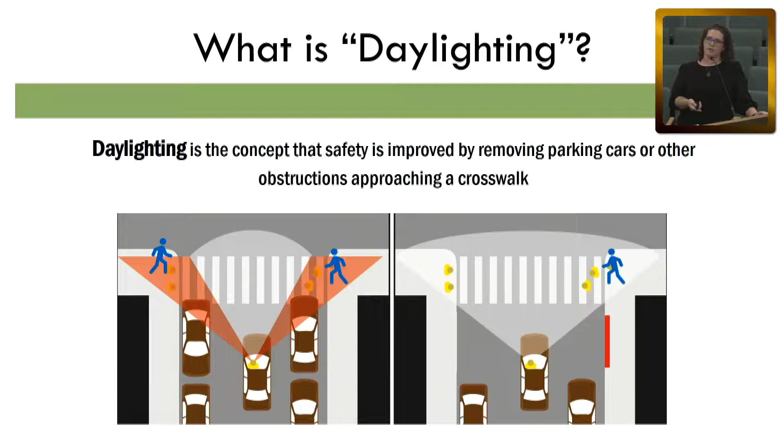So what is daylighting? It's the idea of making intersections more visible, the concept that safety is improved by removing parked cars or other obstacles approaching a crosswalk. In this graphic, on the left we have parked cars right up to a crosswalk, people crossing in both directions, and an approaching vehicle whose line of sight is obstructed between the pedestrian and the driver because of the parked vehicles. On the right side, where we have a red curb and no parked vehicles, the line of sight is open. The actual AB 413 bill text says: a person shall not

stop, park, or leave standing any vehicle, whether attended or unattended, in any of the following places: within 20 feet of the vehicle approach side of any marked or unmarked crosswalk, or within 15 feet of any crosswalk where a curb extension is present. This text amended Section 22500 of the California Vehicle Code. As you can see, this is item N. There are many other areas that are prohibited for parking; this is just an additional one.

There are a couple caveats at the bottom. Until January 1st of next year, only warnings can be issued for violations, unless the person parked where there is already a red curb or a no parking sign in place. The other caveat is that a different distance than 20 and 15 feet is allowed, but it must be justified through traffic safety engineering standards.

So breaking down the text of the bill, what is a marked crosswalk? On the left here we have a 4-leg intersection of Shadelands Drive and North Wiget Lane in the Shadelands area. It's stop controlled, with marked crosswalks, kind of what we think when we think crosswalks. On the right side we have what we'd call a T intersection, also on Wiget Lane but further south on Cedro Lane. This is a school crosswalk, so you can see we have yellow crosswalk striping and some curb extensions that were mentioned in that bill.

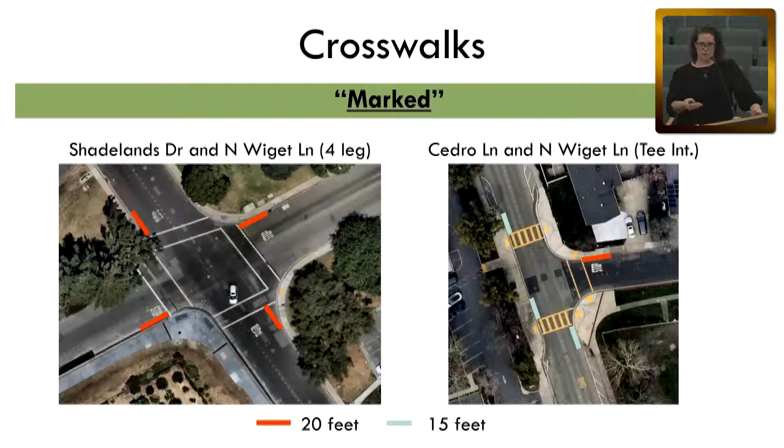On the right side, this T intersection, again approaching a crosswalk, we have curb extensions. So instead we have 15 feet. It's relatively close to the crosswalk, but coming southbound, the approach direction has 2 crosswalks, so there's 15 feet in advance of the first one and 15 feet in advance of the second. At this location, it's in an intersection, so there's no need to further restrict parking. It's a travel lane, there's no parking here anyway.

So then we get into unmarked crosswalks. Technically, whenever 2 roads intersect, there are crosswalks at that intersection, marked and unmarked. On the left-hand side is a typical residential street with unmarked crosswalks. On the right side, we imagine as if those same striped crosswalks are applied at this location, applying that same width.

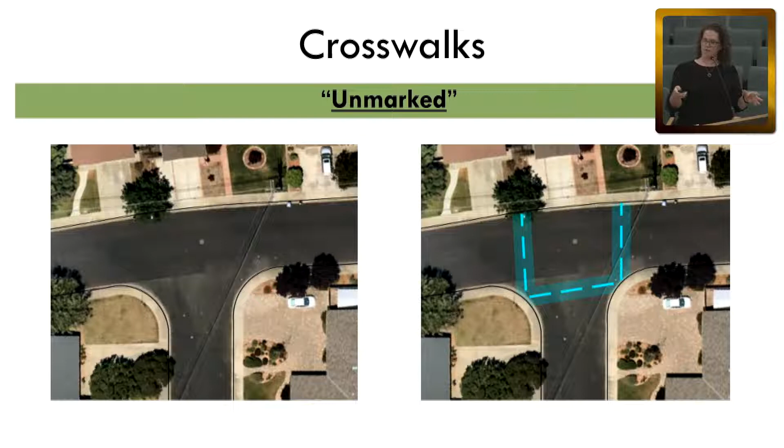We now have areas where parking is not permitted or is prohibited. So walking through this, it currently has no striping. Coming from left to right, it doesn't really make sense to park here. The curvature of that corner starts similarly coming from top to bottom, but it's that T side of the intersection where there's a lot of curb space that was previously used as parking, that under this AB 413, parking is now prohibited.

As we've been rolling this out, these are a couple of common questions we've been receiving. One: when 2 streets intersect, there's crosswalks—does this apply to courts and cul-de-sacs? Yes, they intersect, there's crosswalks.

Does this apply to an alley? Not entirely. In Walnut Creek we have commercial lane, that's really where we have an alley. It does not entirely apply to the alley, and it does not apply across the street. If you're walking across and you have to cross the alleyway, that part's a crosswalk, but not across the major component. That's because of the California Vehicle Code definition of what a crosswalk is.

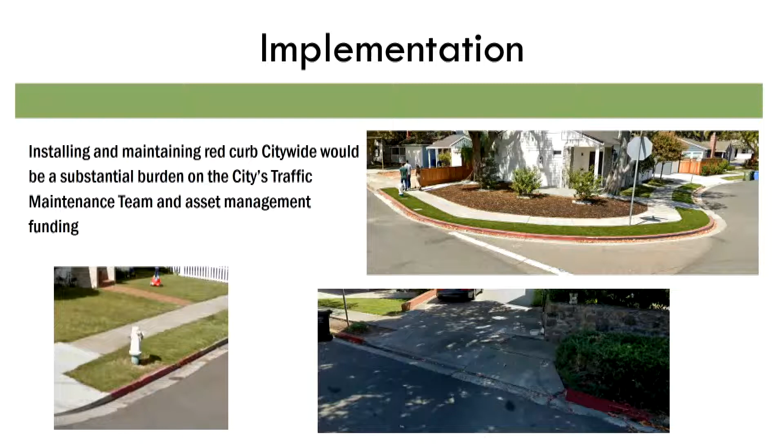As we've been rolling this out, the priority here is traffic safety. AB 413 is about traffic safety, where we're putting this red curb to make sure no one's parking here. There are areas known to have many pedestrians and bicyclists—we use the term vulnerable roadway users. These are individuals not protected by a vehicle if a collision were to happen, and they have a higher chance of injury or fatality.

The areas where we've completed our review and red curb installation include downtown Walnut Creek, and then all of our trail crossings: the Contra Costa Canal, Iron Horse, Ygnacio Canal Trail. Each one of those has that daylighting, the 20 feet clear.

The next section we're currently involved with includes all the areas around schools. What we're reviewing there, we call it the walk shed—it's the quarter-mile distance where a pedestrian would more likely be walking. If there's a known walking route a bit further outside of that, we'd look into that as well. Other prioritized locations we're looking at are community spaces, parks, pools, community centers, senior centers, libraries. It's this item where if the commission can think of other uses with walking and biking that we should thoroughly review as well.

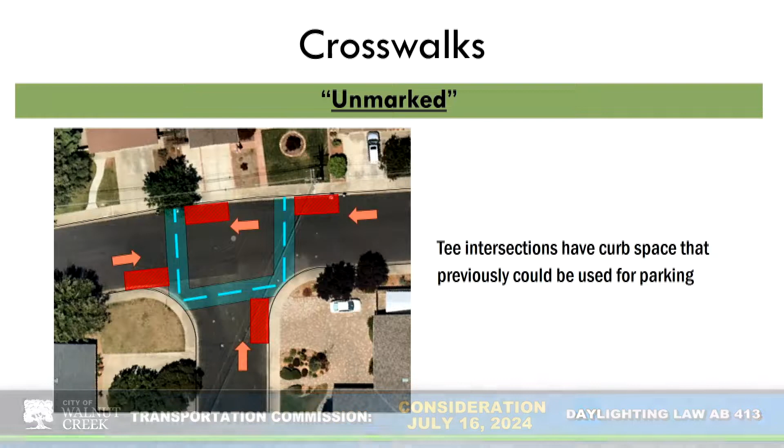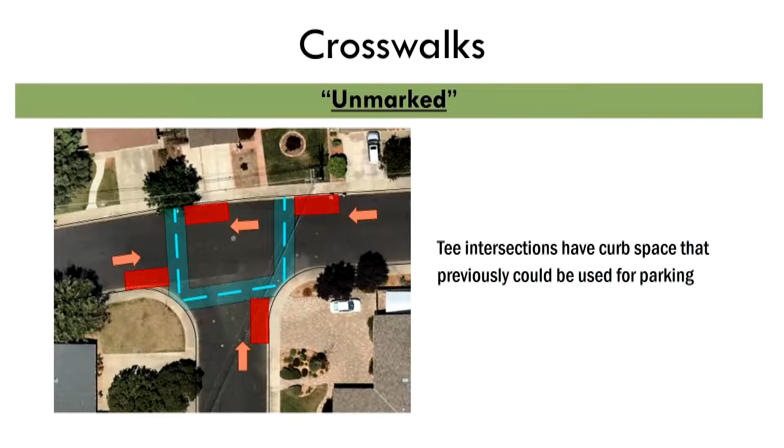So can you go to the unmarked slide? That one, yes. I just want to be clear - if it's two streets intersecting with a straightaway on one side, that still includes the lead up to that intersection? Correct, so in this case that's like the top of the T. I feel like that's going to be the most confusing one for people to understand because the crosswalks are unmarked, and it's not like people intuitively think that side of it is the intersection. So has the team thought of any way of indicating those specifically without having to do a red curb?

So that's where a lot of the education component has come in. Last week we just did a neighborhood workshop, and this was a very popular flyer that got handed out. But we're open to it - we could possibly do temporary striping, but yeah, we're really not looking to do red curb. I totally understand that, don't want to incur that cost. I was just wondering because I live in an area that's going to experience that.

For the community spaces, one suggestion I have for staff to look into is where people park for BART access that's not in the BART parking lots. There are some side streets walking distance of both Pleasant Hill and Walnut Creek BART stations that during the week will have a lot of people parked there and walking, because they'll be walking from their car to BART and back. So that might be a high traffic area staff could look into. I live equidistant between the BART stations, so I see it on a consistent basis.

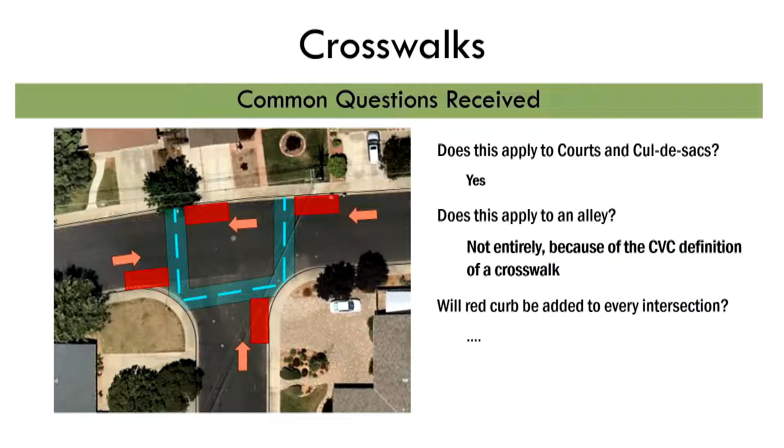On the outreach, I think repetitive social media broadcasts would be really good—Nextdoor, Facebook, Instagram, etc.—because so many people are on social media. And the other thing, which could be a mitigator to painting red in these residential situations, is I don't know if we have, or could have, temporary signs that rotate around the neighborhoods. That could work without painting permanently, kind of like those digital speed signs, but much less fancy.

I think that was it. Thank you.

I second the concerns about the T intersections, because unmarked T intersections and implied crosswalks are not things people think about, particularly on the street that's the top of the T, where people park. It's an easy place where they think they're not in the way. So I like the idea of temporary, foldable, collapsible signs there for a bit to see if that helps people stop parking there, maybe testing those out in high-trafficked or high-impact areas to teach people, since these basically eliminate two parking spots.

Also, an idea: Walnut Creek has a lot of car dealerships, and I was wondering if there's a way the city could work with the dealerships so that as people buy new cars, they get a reminder of the new parking laws, or at least post signs at the dealerships. Some sort of partnership with them would be helpful, because that's a period when people are focused on vehicle use and traffic laws. Thanks.

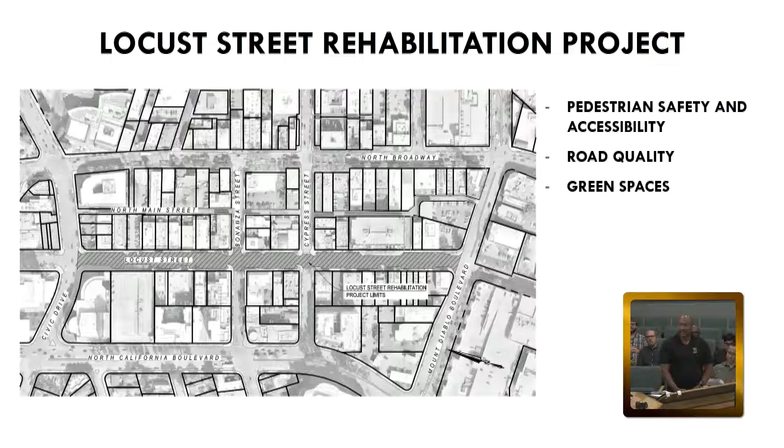This project is one of the final phases of Locust Street, as all the utilities—East Bay Mud, Central San, PG&E—have all upgraded their utilities there. Some of the areas we are looking at, not all of them, are pedestrian safety and accessibility, road quality, and green spaces.

Our contractor is currently working on Locust Street. We are currently on the southwest corner of Bonanza where they are upgrading the concrete work. We are repairing damaged sidewalk that has been damaged by trees, and we are upgrading all our curb ramps so that they are now ADA compliant.

We're increasing the width of sidewalk areas where we have existing planters, giving back additional width of the sidewalk. We're addressing the new daylighting requirements by allowing pedestrians to see drivers and vice versa more easily. We'll be repaving the roadway from Civic down to Mount Diablo, which will allow for a smoother drive and improve the quality of the road.

Finally, we will be rejuvenating and increasing planter areas. Some of these planter areas will also be stormwater treatment facilities, and we will be replacing trees that we have cut down. We hope that once we're done with this project, it will be an area that is more easily walkable for our pedestrians, and provides a nice location for our businesses and for their patrons who come down to our downtown area. Thank you.

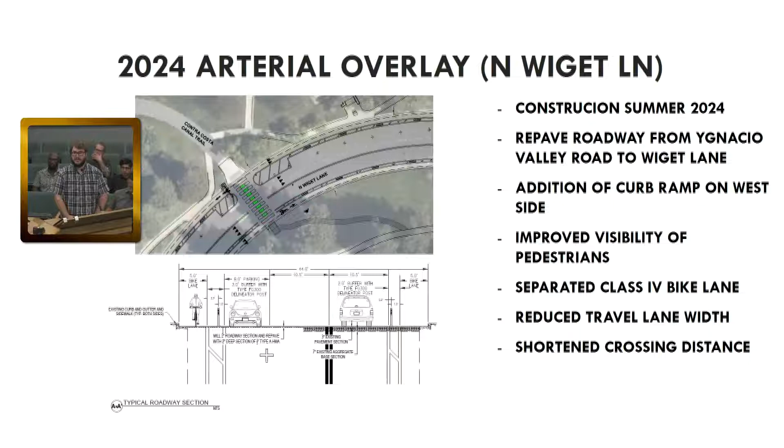In addition to that, we will be doing striped curb extensions at the intersections of Mitchell and Shadelands, just to help reduce the crossing width for pedestrians, reduce the travel lane, and get people to cross quicker. This is going to be going into construction in about a month.

The next one to talk about is the 2024 and 2025 slurry seal project. This project is part of our annual surface treatment program that we do every year, and for this year we're going to be doing two types of treatment: a slurry seal and a cape seal.

These treatments will be applied along various roads within the Livorna Estates and Castle Hill neighborhoods. Part of the two different types of treatments is that slurry seal is considered one layer, and Cape seal is considered two layers, so it's a much hardier treatment.

As part of that, it requires us to upgrade all existing curb ramps to ADA compliance, and that's what we've done. We just finished that up last week, where we constructed ADA curb ramps along Lancaster Road and Castle Hill Road in anticipation for the Cape seal that's coming in.

One thing to note about the Cape seal is that Lancaster Road was initially slated for this year's Cape seal, but due to some conflicts with utilities, that will be pushed back to next year's slurry seal project. We still did the curb ramps this year in preparation for that.

In addition to the curb ramps, we're also going to be putting in Class 3 sharrows along Castle Hill and Lancaster Road next year, as part of the grand bike plan at the city. As far as 2025, we do not have the roads picked yet, but they will be in the Larkey Park, Buena Vista, and Dorado Park neighborhoods, and we'll start getting started on selecting the roads.

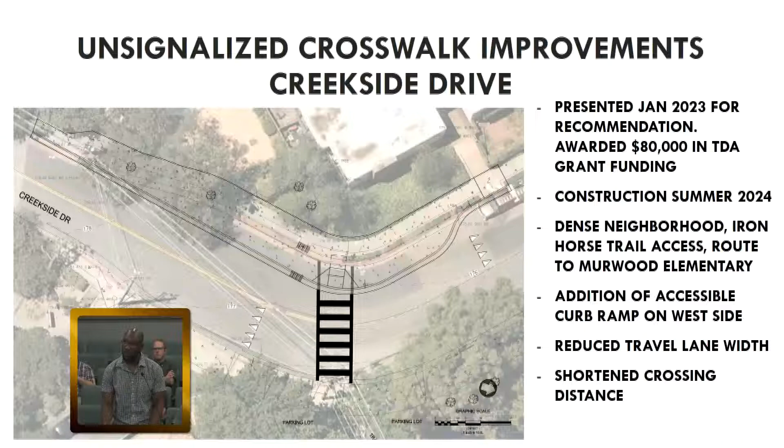The next project I'll be discussing is the Shadelands area crossing improvements, which we're bidding this summer. This project consists of the addition of rapid flashing beacons at the Viamonte Senior Housing Facility, as well as a rapid flashing beacon and striping improvements in front of the School of Performing Arts on Mitchell. These are in hopes of increasing pedestrian visibility.

This summer, we will be bringing these improvements to more locations throughout the city, as well as adding rapid flashing beacons to locations which have already received striping improvements.

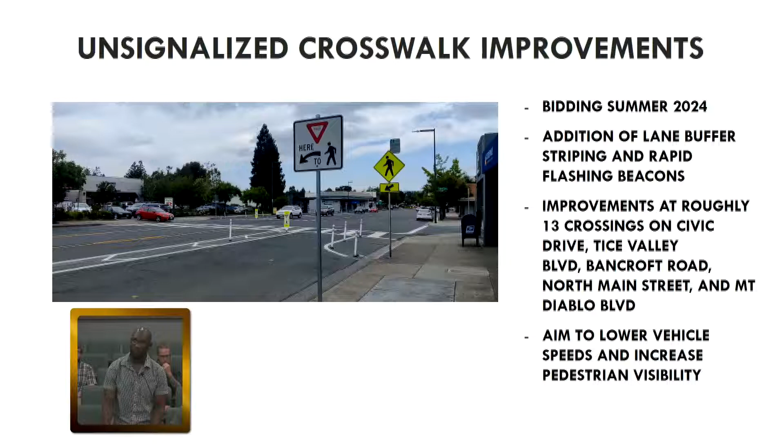Caltrans is responsible for inspecting the majority of the city's bridges. There are a few that do not meet the Caltrans criteria, so in 2022 the city hired a structural engineering firm to assess these bridges that had not been inspected by Caltrans. One of them was the Castle Hill Bridge at Tice Creek, and it was determined that it was structurally deficient, so an emergency strengthening project is going to commence this summer. That strengthening project is going to be installing steel I-beams at the existing wooden girders, and a full replacement is planned for future CIP projects.

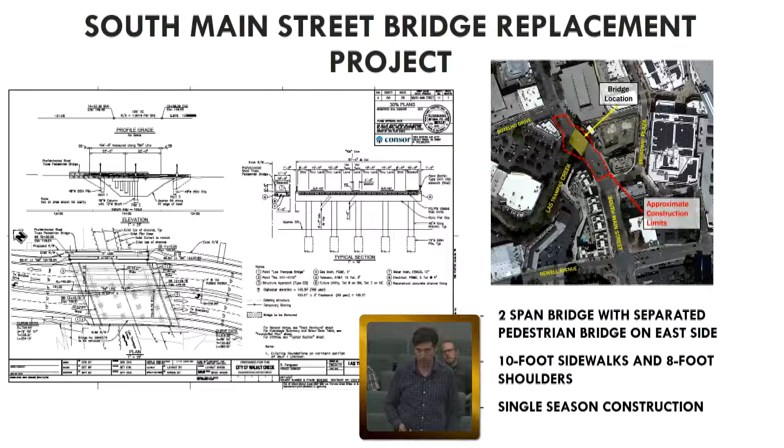The next project that I'm going to discuss is the South Main Street Bridge Replacement Project. This is one that has been discussed at the commission meetings in the past. It is going to be replaced, the existing bridge, with a 2-span bridge. One of the spans is going to be devoted to pedestrian bridge. It's going to be a 10-foot wide pedestrian bridge that will also function as a utility bridge. During construction, vehicular traffic will be diverted around South Main, detoured either through California or Broadway. This is expected to commence in the next several years. The design is still being worked on, but thank you.

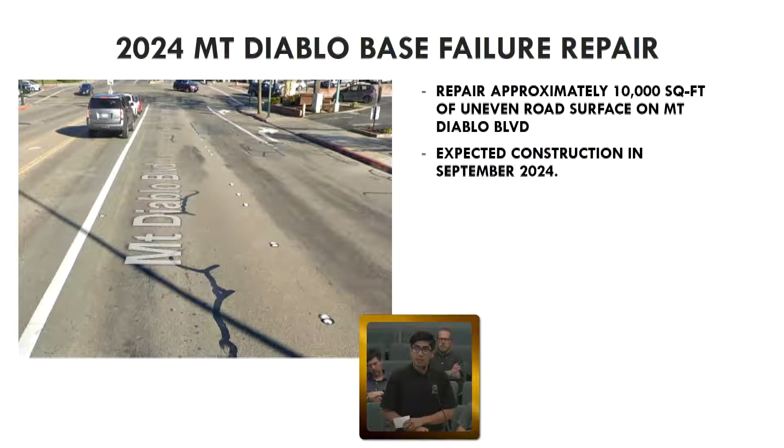The next project that I'm working on is the Mount Diablo Base Failure Repair Project. For this project, we will be repairing approximately 10,000 square feet of uneven road currently on Mount Diablo Boulevard, especially on the eastbound lanes downhill intersecting North California Boulevard. This project was recently awarded at the last council meeting, and it's expected to be in construction in September of this year.

The last project that I'm here to talk to you about is the Ygnacio Valley Road base repair and restriping. We will be performing base repairs on urgently needed locations throughout Ygnacio Valley Road from San Carlos Drive to the city limits, the side that intersects Concord.

We're scheduled to repave Ygnacio Valley Road from Oak Grove Road to the city limits at Concord in 2026.

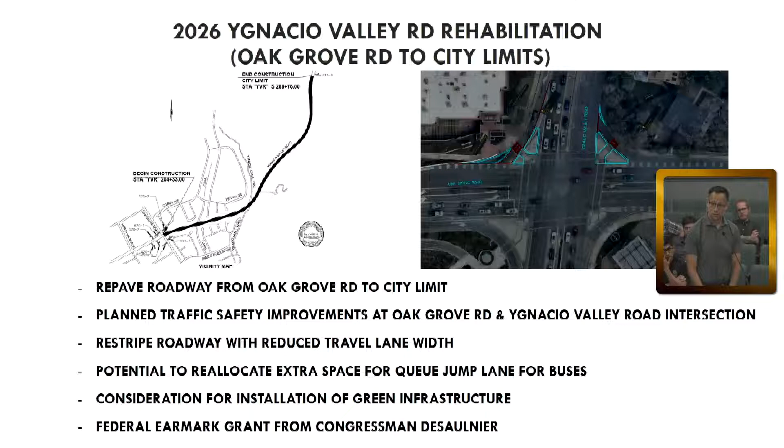Construction will be funded in part by the federal One Bay Area grant. City staff has been working with the school on the frontage improvements as the school is planning a project on the school property to improve their facilities, including traffic circulation to their pickup and drop-off areas. The school's project is scheduled for 2025 and the city's project is scheduled for 2026.

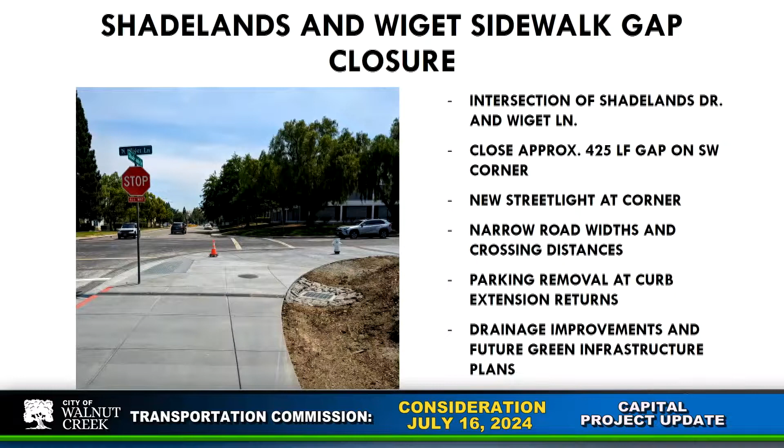Okay, so this is the one that you marked for the future to have a 5-foot sidewalk and a bike lane, yes? Yeah, that's correct. Both grade separated up on the sidewalk.

Any plans for trees? Because right now it looks very, very hot. Not that I'm aware of. That would come later down the road, but that's a good suggestion. Okay, I mean, it's fine. You can't see some of the trees. Well, it looks like there's a lot of trees across the way, but not where they've just recently done things, so that's why I'm asking. I think there are a couple of them, though.

A component of this project is to put green infrastructure and landscaping in the back, but this project didn't have the funding for that piece, so that's something for the future. That actually points to a general question I had — when you're talking about green infrastructure, do you mean plants and trees and drainage, or what specifically? Drainage, retention, and treatment. This would probably be a bioretention facility, which would store the water or equalize the flow going into the storm drain, and there are typically drought-resistant plants that take up pollutants and other deleterious things. Great, thanks. You're welcome.

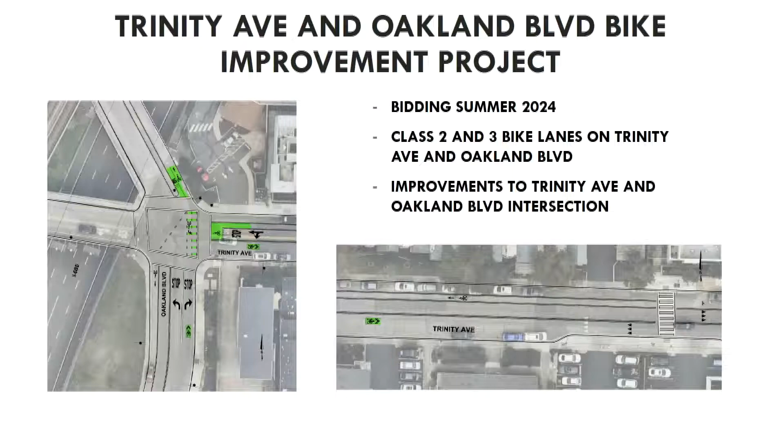Happy to help. Since there's a moment for comment, on Oakland Boulevard where you turn in from Ygnacio, it's that shared and raised pedestrian and bike trail. Three times in the last year, since I take that road almost every day, there have been cars that come up there. We need to distinguish the entrance better, because with the BART tracks above and the lighting, you just can't see that it's not the road. Somebody's going to get killed that way, so I'm just calling that out for attention.

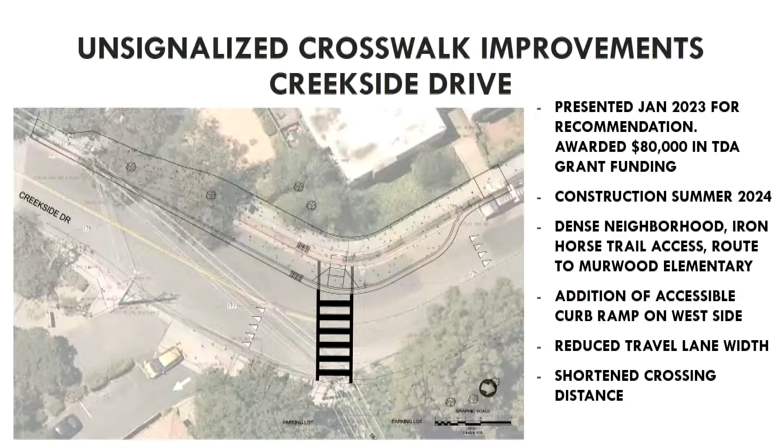I just want to say congratulations on getting the grant, that's great. Thanks for the recommendation. Next slide then.

The rapid flashing beacons—are those the ones I typically see elevated on the signs, or is it something else? They're the signs similar to what's shown in the photo, however there's a candy bar lighting element underneath actuated by a push button. Once the pedestrian presses the button, the sign lights up and allows enough time for the pedestrian to cross with illumination.

Do we ever use what I call taxiway lights, like at an airport? We used to have lights in the ground flashing on Mount Diablo by Nordstrom. Do we ever do anything like that anymore? Yeah, those are called in-roadway lights. They preceded what we now call rapid flashing beacons, but they're really difficult to maintain—heavy trucks hitting them cause them to break. So we pulled them out, and it's pretty standard practice in California now to use rapid rectangular flashing beacons instead.

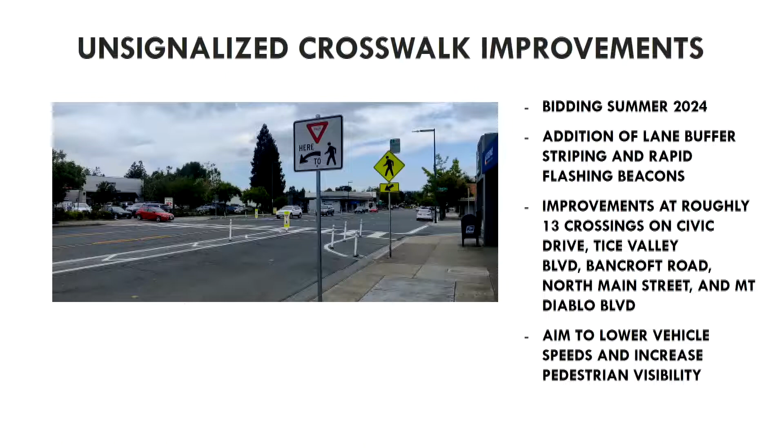Thanks—I know this is in front of the Ace on Mount Diablo, and I've crossed this intersection almost every day in the last year. It was so wide that sometimes you couldn't see pedestrians, and this really brought awareness and slowed cars down. I'm complimenting this; I've seen how it helps people, and I can't imagine people weren't hit here before. I'm grateful to see this and looking forward to seeing all 13. Great work, thank you. And this location will get a rapid flashing beacon as well.

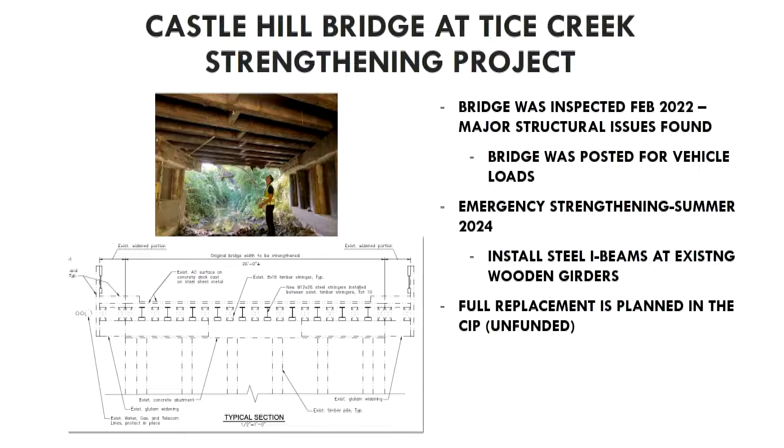The maximum closure time will be 10 minutes, so they won't wait more than that at any given time. The contractor needs time to install the I-beams with no cars on the bridge. Fair enough, you don't want it deflecting while they put in steel. Yes, and they're actually wedging it with wooden wedges so it has good engagement with the existing road deck. Makes sense.

Thanks. So my one question on this, because obviously traffic's going to be stopped since there'll be no bridge.

Realistically, how long does it take to replace a bridge like this? Well, that's the goal, to do it in one season, instead of trying to do it in two parts and divert traffic while building the new bridge while cars are still on the old one. Ideally it's one season. When you say one season, like 3 months? Probably closer to 12. Oh, so a year. Yeah, a year, like one rainy season.

We don't have a schedule yet at this point, we don't know exactly how long it's going to be. So this one's going to be a much bigger deal. Yes, and that's part of the reason we're doing the pedestrian bridge, to at least keep pedestrian access open, so pedestrians can go through and the cars will figure it out.

You can't speed it up with binge watching, I guess, through that season. I would just stay away from that area. Thank you—so we don't have a timetable yet, but we're going to be closing that for a year.

And what is the impact on the whole downtown and traffic? I don't even know how you think about that, just curious. So as part of the environmental analysis, this came to the commission a few years ago—a traffic analysis was conducted that analyzed the detour traffic would need to take through downtown to access their destinations, assuming a full closure. There will be a detour, and yes, it'll be a different congestion scenario, but there weren't any significant impacts found in the analysis.

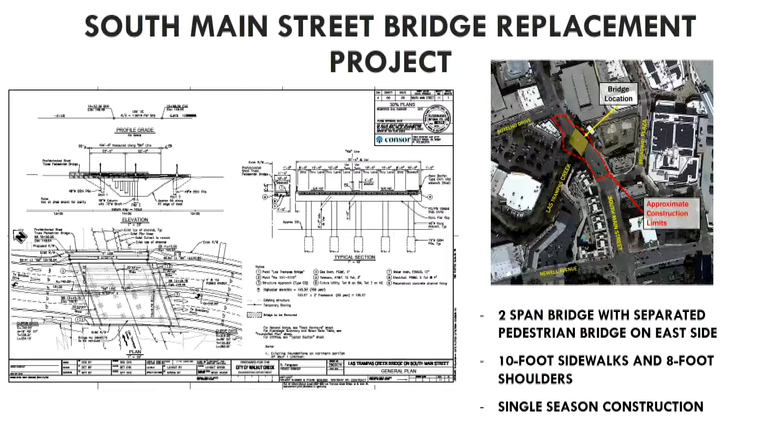Okay, that's fine. Okay, next one. No questions or comments?

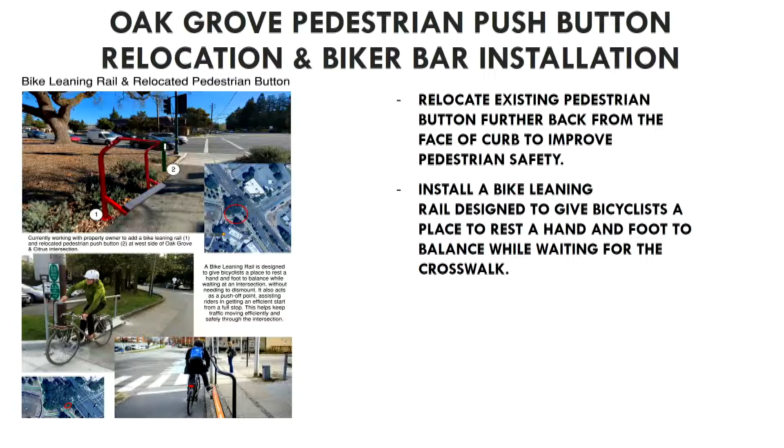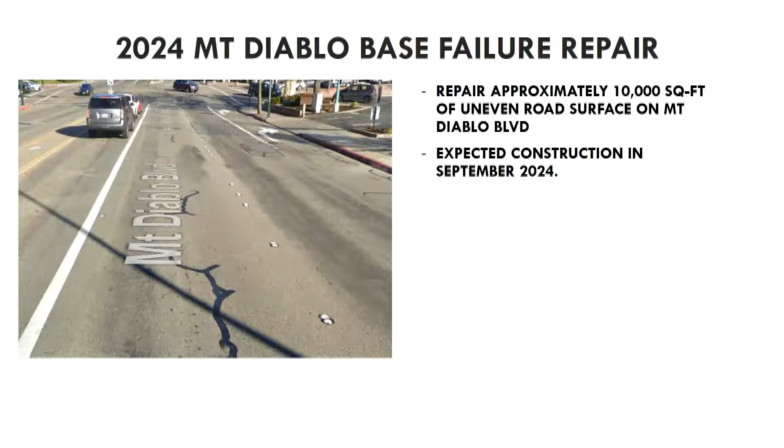No questions or comments on that. Okay, next.

All right, I did have a question or comment on this one, because there's a subsequent slide I'll speak to as well. It's really funny, when I saw this reading the materials, we were just driving up towards Clayton, and my wife and I said to each other, wow, there's a lot of turbulence going up here. Then you hit the Concord city limit and you see the new pavement. Lisa said, well, you're on the Transportation Commission, why don't you call them up?

So I'm very happy to see that you're going to be working on Ygnacio, especially from Oak Grove up to the city limit. I think that's definitely long overdue.

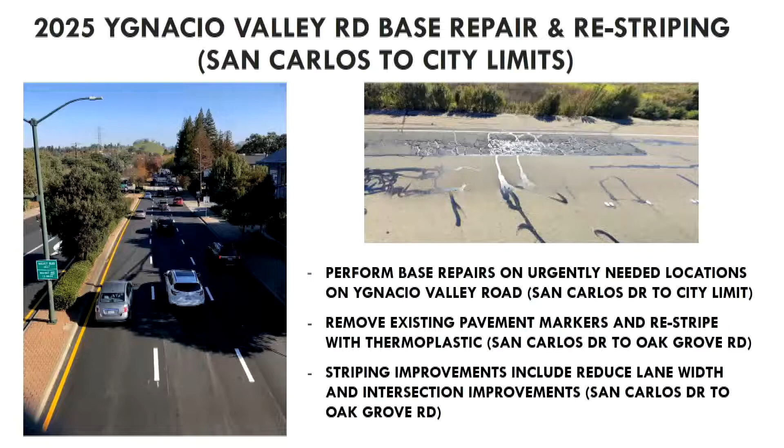On the San Carlos to Oak Grove section, where you have San Carlos to city limits, you talked in here about striping improvements, including reducing lane width and intersection improvements. Where would we be reducing lane width? That would be starting from San Carlos to Oak Grove. The left lanes will be reduced, as well as the right lane.

So the YVR lane, stretching from San Carlos, the left lane or all of them? All of them are technically being reduced.

Okay, and I'm sure you've already looked at this, but I'll ask anyway. From a safety perspective, it's pretty tight as it is already driving there, as I'm a regular user of YVR since I live out in Walnut Creek. I'll let you answer that. So there is a pinch point as you approach San Carlos going eastbound right before Heather Farm Park, but after that it actually opens up quite a bit.

We have higher posted speed limits, and we're trying to bring down speeding along Ygnacio Valley Road. It was identified in our local roadway safety plan as one of our high injury corridors, and speeding is the number one concern. Narrowing lanes does reduce speeds, and that's what we're trying to tackle with this. Okay, makes sense, it'll be interesting to see.

This has become a de facto freeway, unfortunately. I wanted to add a quick clarification, that this cross section that will continue is pretty much exactly what we have on the portion that was just recently done between California and Civic and San Carlos.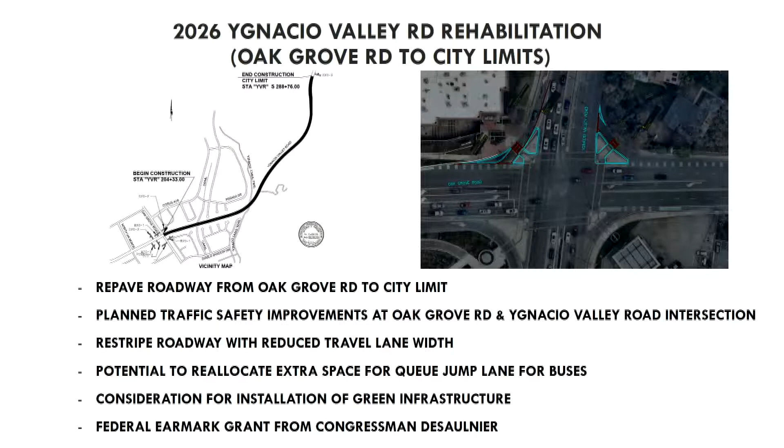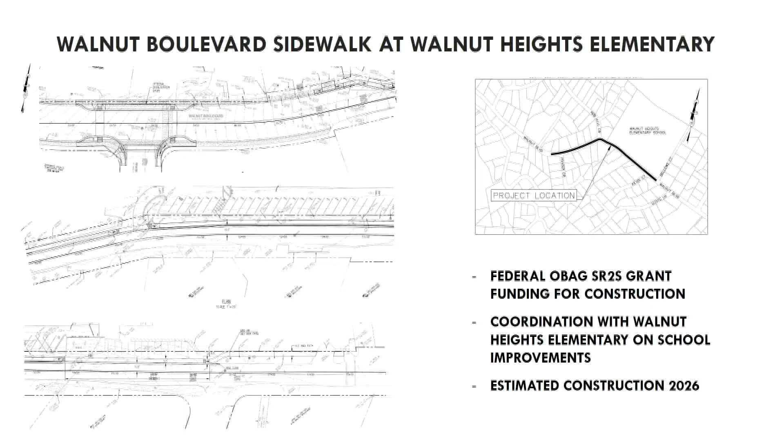Okay, next. I think I already shared my comments on this. We covered it - no questions or comments on this one. Okay, next. No questions or comments on this one either.

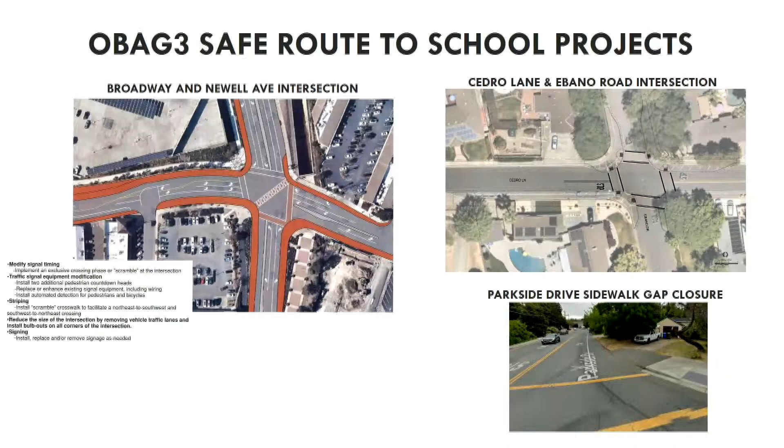Oh actually, I'm sorry, I did have one - I know, I'm just a wishy-washy commissioner. When you talk about a sidewalk gap closure, can you define the sidewalk gap for me? Yes - on Parkside Drive, there's sidewalk on the east side, then a section with no sidewalk, and then a couple houses down the sidewalk picks back up. So this would install sidewalk in the gap. Thank you, sorry for the dumb question.

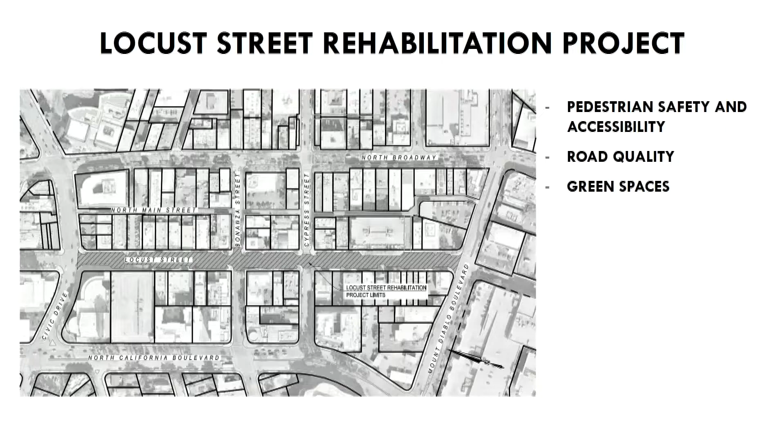It's all good. Okay, next one. That was it. Do we need to go back to the beginning for comments? Let's go back to the beginning one to see if we had other comments, but we'll try to go quick. Awesome, okay, anything here? No. Okay, next. Nope, next.

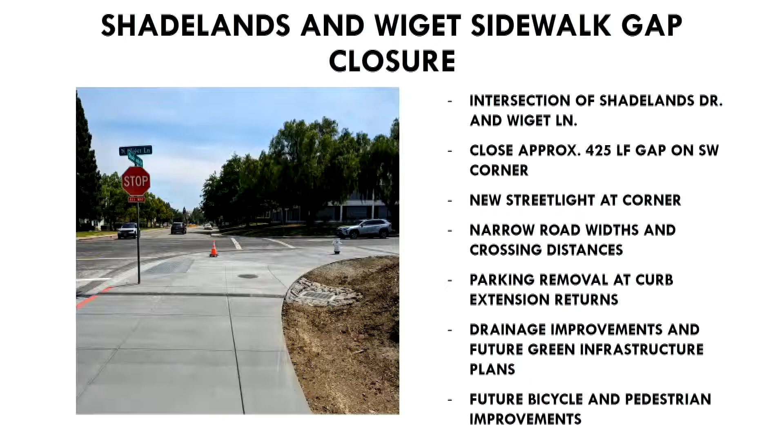My comment on this one is I used to drop my daughter off at Valle Verde Elementary School coming from the Woodlands neighborhood, heading to the Shadelands Art Center where there's a city preschool, and we were those people who had to walk in the street. So I'm very grateful this is being completed - it just made logical sense. I know there's a lot of other kids who ride bikes to the art center, to the right of this picture, which has a lot of after-school programs. This was well needed.

No comment. No comments on this one.

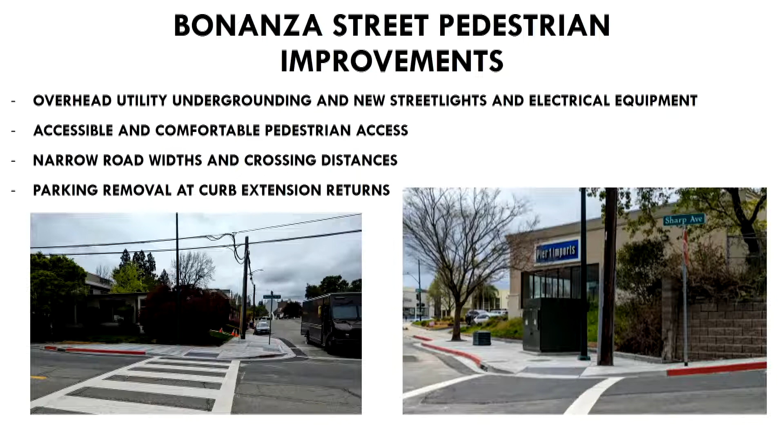I just wanted to say thank you for thinking of the accessible path. I've experienced, not in Walnut Creek but in Contra Costa County, quite a few places where signs, telephone poles, and streetlights make it impossible to use a wheelchair on the sidewalks. It's like, what is the point of having the curb cutouts if people actually can't use them when they need it? So great job there.

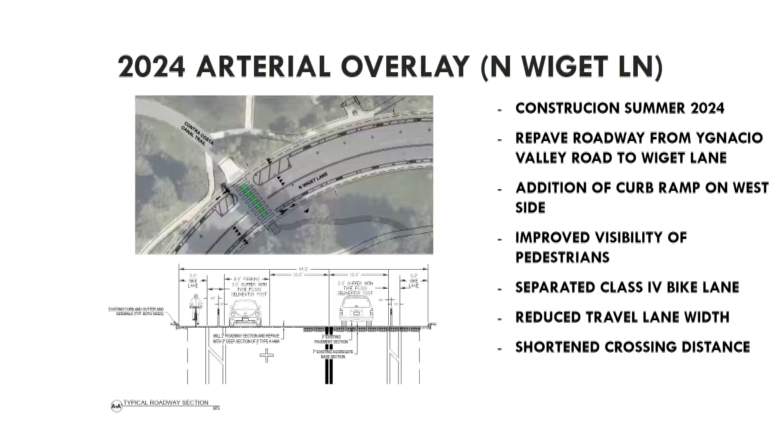Okay, next one. No comments, nope, okay. I think we're back to... yeah, I think we're caught up. Okay, anything else, guys? No, sir. Anything else on your side?

Awesome - can we make a motion that Alex has to buy everybody a beer for working late tonight? Nope, sorry, I don't think that's allowed. Wait, I'll second that motion.

I know this is public record.